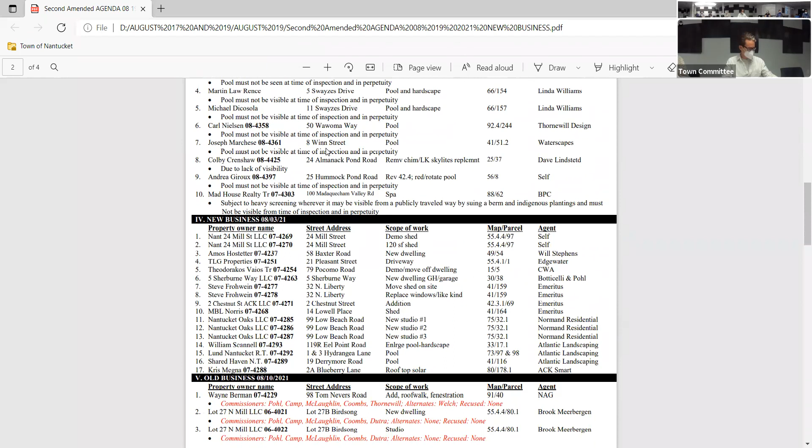Thank you. And the agenda is all set to go. Is that right? It is indeed. Okay, can I have a motion to approve? Motion to approve the agenda. Diane, you were all over that one. So on Diane's motion, Abby aye, and John is in favor. Diane, on your motion? Aye. Good, aye, and I'm in favor too, so that motion carries.

Any public comment? Hearing none, we will move along to, oh wow, we got a pretty healthy consent agenda. Oh, I have a question on one of those.

Yeah, okay, go. So it's on the one with conditions. Oh, consent with conditions? Yes. I don't see that anyone on our board right now has a conflict sitting on this, so I would request a motion to approve the consent.

Okay, that I will do. Very good. So Abby's made a motion to approve the consent agenda. On that motion, Diane, aye. Thank you. John, aye. Very good. Abby on your motion, aye. And I'm in favor, motion carries.

And you had a question on consent with conditions. 78 Milk Street, I just wanted to maybe take a peek at it. It's the one that's very exposed, it's that triangle. Milk Street goes... oh yeah, there, Tom McCann's and place, yeah. It says pool location, but I don't know what they mean by that. It's right at the end of the triangle.

You know, it's interesting you brought that up. Well, have it ready to go. So I'll give it a look. I just saw 5 pools in a row and said maybe I better check and look at all these pools. All right.

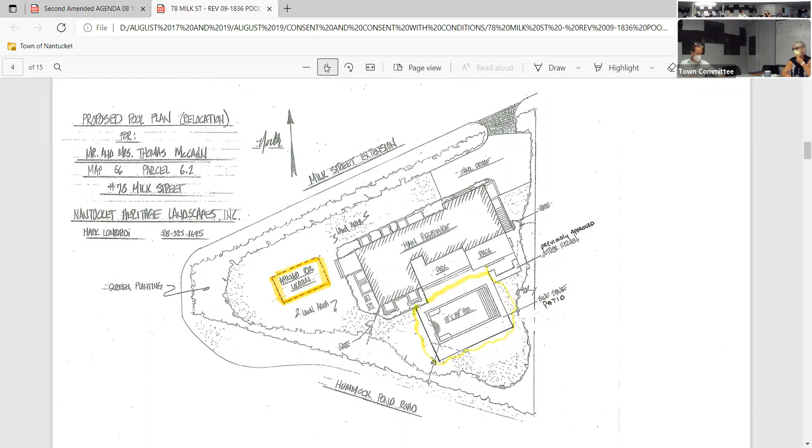So let me just say, Abby, if you have a concern about this, what we should probably do is pull it off of consent. Yeah, I'll make a motion to hold for review, or actually in point of fact, let's do this: your motion would be to remove and review that item. What's the number on that again? Item 3 from consent with conditions.

Would that be... yes, please. Okay, Abby's made a motion. So here's what the motion should be: approve the consent with conditions, accepting item number... with the exception of item number 3, which should be heard separately.

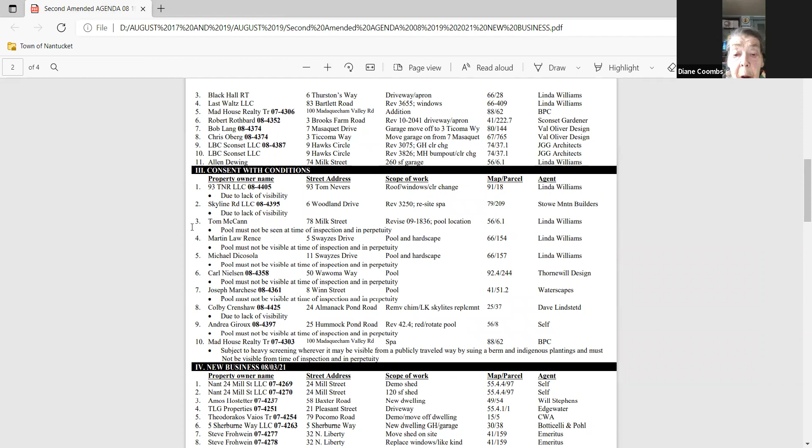So on Abby's motion, Diane, aye. Thank you, John. The motion is to approve consent with conditions, but pull out the pool application that was on consent with conditions because we might want to take a further look at that in terms of visibility. So consent with conditions approved with the exception of item number 3. You're okay with that motion? Okay, thanks. And Abby on your motion? Yes. And I'm in favor, so that motion carries.

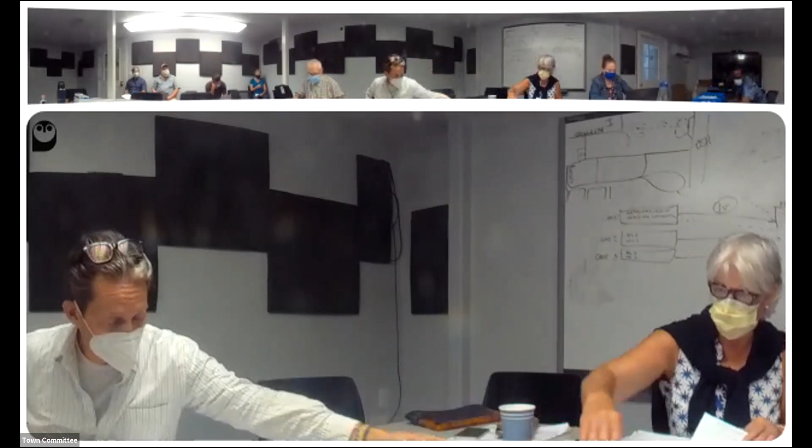Okay, so that was consent with conditions. And now we're going to new business. Do we have somebody here for 24 Mill Street? We do not. Okay, so we're going to need a motion to hold items 1 and 2.

We're gonna hold these two. Let's see, you're right here. This is approved, this is approved, yeah. So now we're on to these first two, but there's nobody here to represent these.

So we're gonna make a motion to hold those two for representation. Okay, moved. John? That's my motion. Okay, so Abby's made a motion to hold. On the motion, John? Yes. Diane? Aye. Abby, on your motion? Aye. And I'm in favor, motion carries.

Okay, Will, you're up next. Matt Schiffer is the project architect. Oh, okay. Hi. Should I stand up or? You can have a seat there.

Okay, now it's just a minute for us to get our drawings. I'd like to pass out an additional drawing if I could, just to supplement. The issue we have right now is we're running what's called a hybrid meeting, which means Diane Coombs is in that little owl right there.

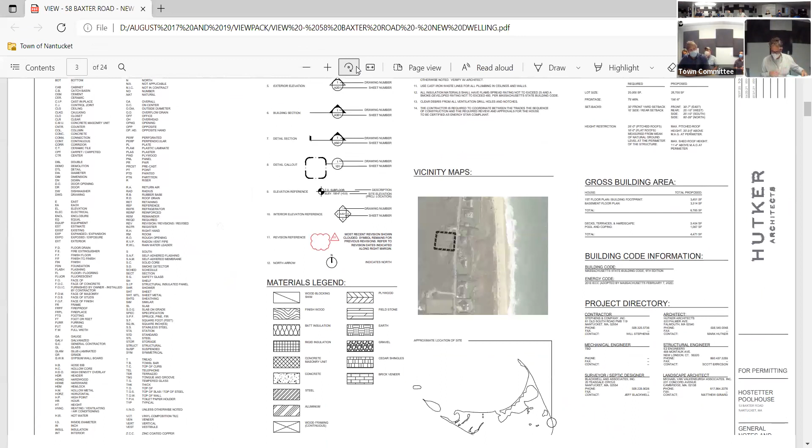All right, so this is on the other side of the street. Yes, it's on the other side of 58 Baxter Road, across the street from the owner's main house. This is a new residence that you arrive at by going through a break in the edge of the vegetation on the road. You go down a winding path through the carved out oak shrub that's present.

That's going to be kept there as well. And then you discover the front entry of the house at the end of this path, whereupon you see the front entry, which is a very vernacular looking front door. And you're confronted with low-lying gables, shingle gables meant to relate to the character and scale of Sconset.

The structure is a one-story structure. It's basically an L-shaped gable. And then on the interior of that L shape, facing south and towards the west, there's going to be a pool.

Is that a separate application? Yeah, it's a separate one.

And then as you look at the front entry, if you see the rendering, on the right, the gable on the right has the kitchen, living room and dining room. So it's pretty much an open structure on the interior. And then the gabled structure with shed at the end on the left is a gym and pool room centered on the pool itself. So that's really sort of almost like a cabana gym.

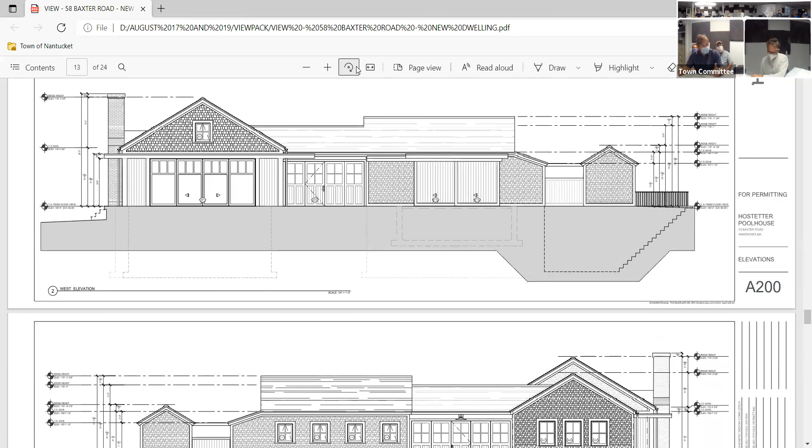There is a basement, and in the basement we have two bedrooms. The rest of the space is still to be determined, but we're thinking it's just a child's playroom right now. So there might be art and projects in one area, and we're not sure about the rest, but the rest is gonna be a mechanical room.

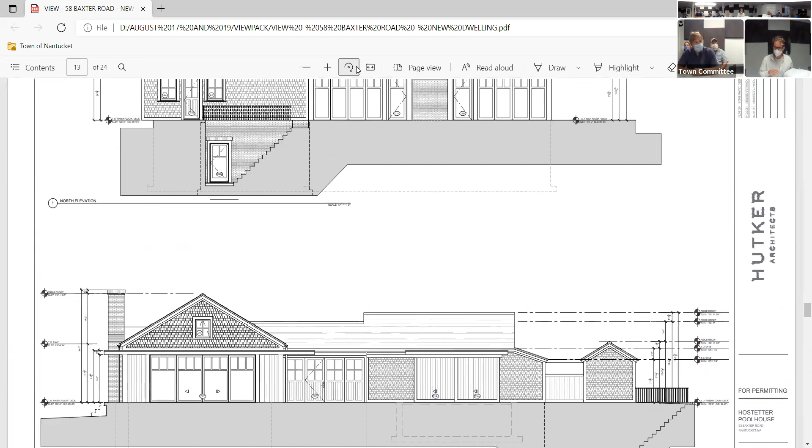Is that it? Yep. What are your colors? We're thinking natural cedar, Nantucket gray trim, and all the trim is very flat profiles, very much in keeping with the local character. The corner boards are 1x6s, Western red cedar.

The shingles themselves are yellow cedar shingles, which silvers out more consistently than say white cedar. So we like to use that because it doesn't have splotches of different weathering in different areas. What kind is that roof? A yellow cedar.

The windows are gonna be made by a vendor in Vermont, Ralph Hirschman, so it's gonna be a custom window system put together by him. He makes them out of wood, and they're gonna be primed and painted in Nantucket gray.

Thank you. Holly, yes sir. I have historic district advisory comments from August 9th. Basically, they had no concerns due to the low profile and lack of visibility. From a staff's perspective, I just want to note that the proposed dwelling's architecture should blend in a little bit more with the 1920s and 1890s structures across the street, keeping with that part of the concept. Those are my comments, Mr. Chair. Okay, thank you.

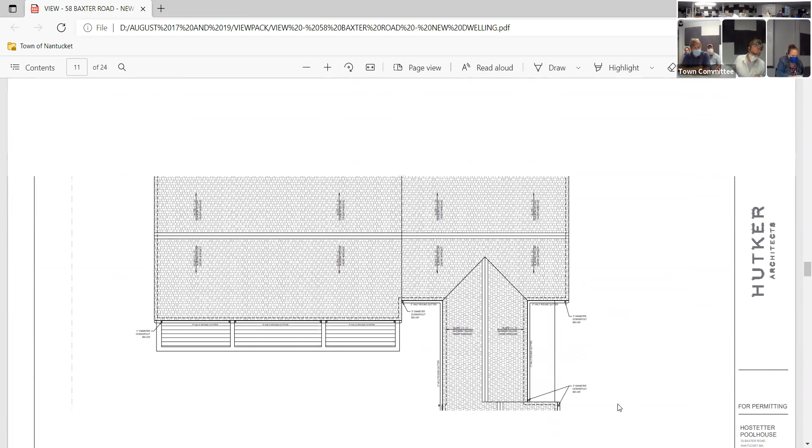Well, but what's the topographical? I think it's super flat, but if you want that... it's super flat, I know this. Oh, actually there is topo on it, and the certificate of appropriateness lists the grade change per side. The greatest grade change is on the western side, which is about 2.5 feet, and the other ones are fairly marginal.

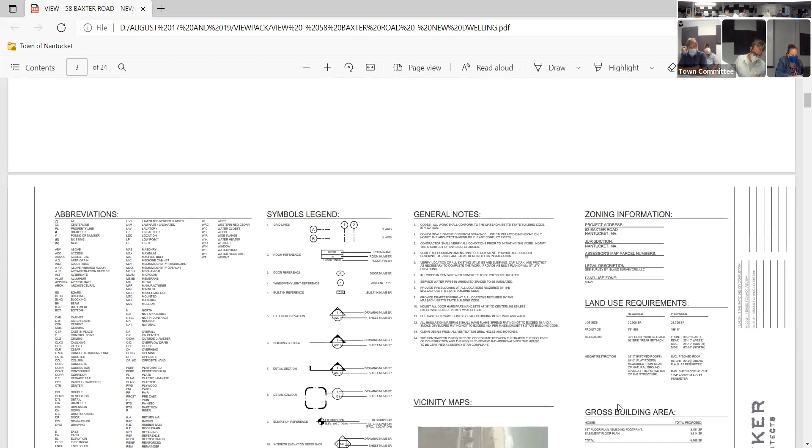But we are going to follow up with the landscape drawings and design for all the hardscape.

Everybody, these roof pitches are all 7 and 12. They're not identified on the elevations, but it says it on the roof plan. Are you referring that the roof pitches should be something else? No, I'm just saying it's not marked on there.

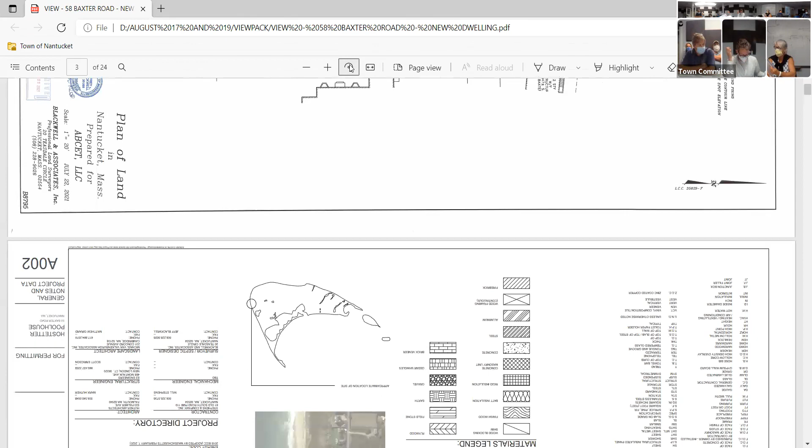And the chimney's brick, and the forms were really meant to be sort of like almost utilitarian forms, like you'd see in fish park or something.

So east is the side that faces Baxter Road. Oh, these are all casements. The ones on the front on the rendering are awnings, the little squares that are 2/2. And then the others, there's 2/2 double hungs, which are going to be wood, probably mahogany, primed and painted in Nantucket wood, with true divided lites.

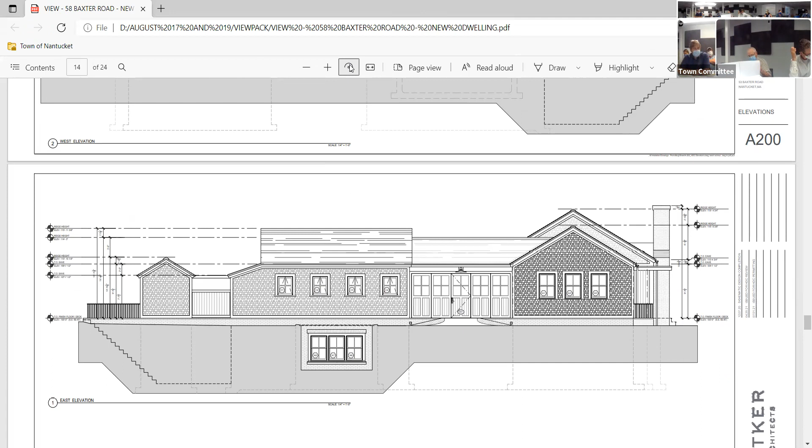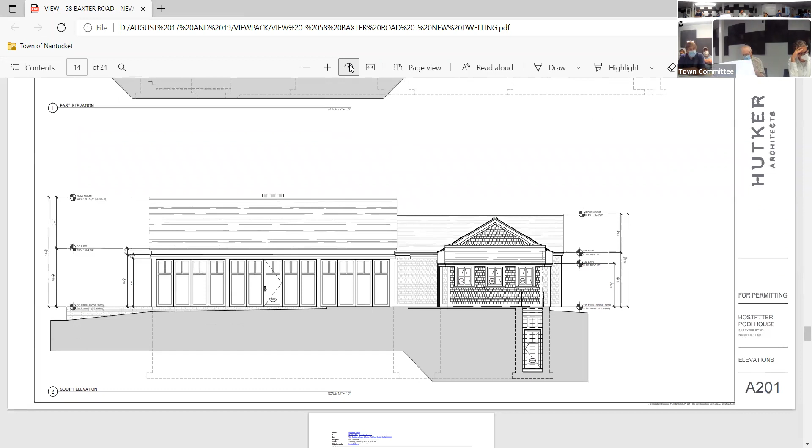Who owns this massive parcel of land to the west of this, between your property and Sankaty? That's Scott Trust, right, Sconset Trust? Yeah, they donated it when they bought the property.

And this is the beginning of Sankaty Golf Course? No, that just goes across Sankaty Road. It doesn't connect to any other.

Okay, anybody want to start? Go ahead, John. What's the length of the building? Well, the length is... length's 104 feet.

104 feet, one at a time. Okay, well, 104 feet long. 104, thank you.

These are rolling doors, right, am I correct? Slide, yeah, they're yep, correct. They're sort of an accordion style door.

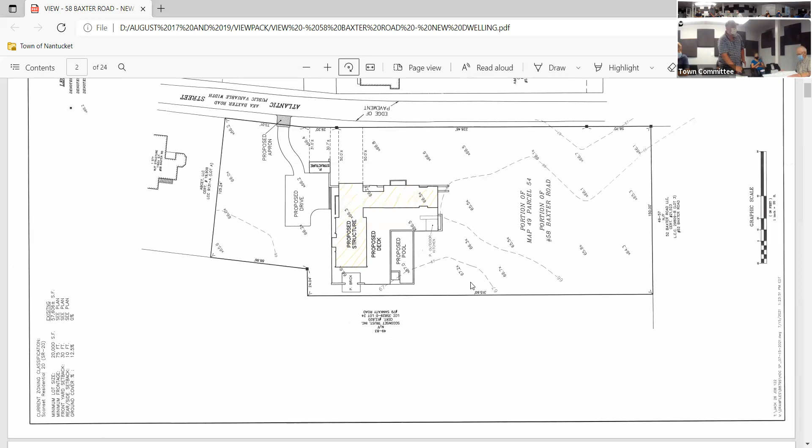Is this lot part of all of this? So this is a separate lot. This was one lot, it's been subdivided to here, so this is a separate lot, and this is a separate lot now. And the paper road you were asking about is kind of like through here. There's no road cut through the two. Yeah, it's a paper road that doesn't... okay, I'll look for it.

Go ahead, ma'am. No, we're okay, gonna drive through the middle.

Abby, are you ready? Yeah, so initially I was like, this is a very refreshing approach to that side of the street. I think they already have a house that's to the right, and it's also a low-lying house, very similar to this in architecture and so forth, except I don't know, is it also gray trim or is it natural to weather?

No, those are both, the two Benchley houses are both like gray, it's Nantucket gray I think. So maybe I'm... But Abby, you're thinking across the street, right from the Benchley house? No, so I'm thinking to the right of this property, if you're looking right at this property, there's another Hostetter house that they built.

Is it natural weather trim on that one? No, it's painted gray. It was Cortland blue and we changed it through HDC about 12 years ago or something.

I understand what HSAB says about it having a slightly modern appearance compared to the house across the street, but if the vegetation gives you peekaboos of the architecture through it, I think it would be fine. I'm sure anything these people do is going to be great, and it's reassuring to have that feeling. I think the architecture is appropriate—it's simple, it's low, it's gray. These are things we asked for. And although the windows are slightly square and the entrance slightly atypical, I think it's refreshing. I really don't have a negative to say about it.

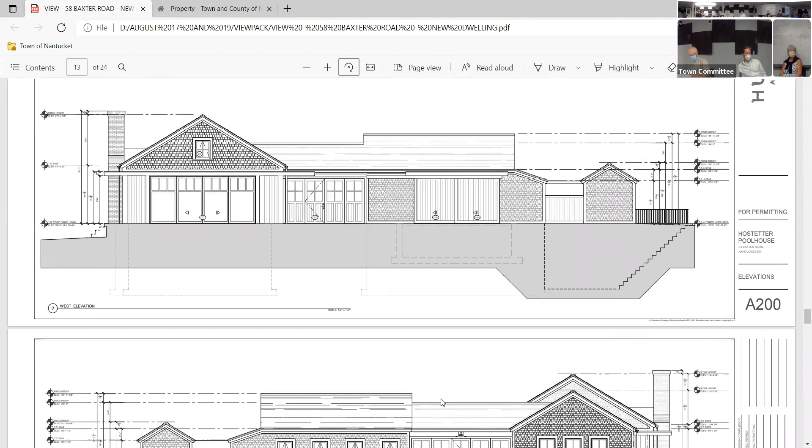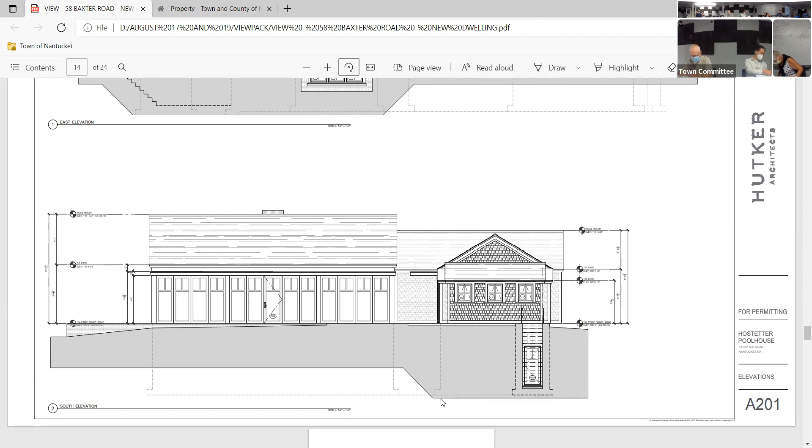I'm a little concerned about the south elevation because I believe you'll see that from Baxter too, with those long expanses of windows facing out to the pool. Ditto on the north elevation—you've got a lot of expanses of glass there, and well, I'm not loving the chimney either. On the north elevation, all that glass you'll see from Baxter Road traveling down, and the south traveling up. Those are my only concerns.

So what would you guys like to do with it? I think you have to figure out whether that is actually visible when you're driving down Baxter Road, because I don't want to see all that glass either. But how would we figure that out?

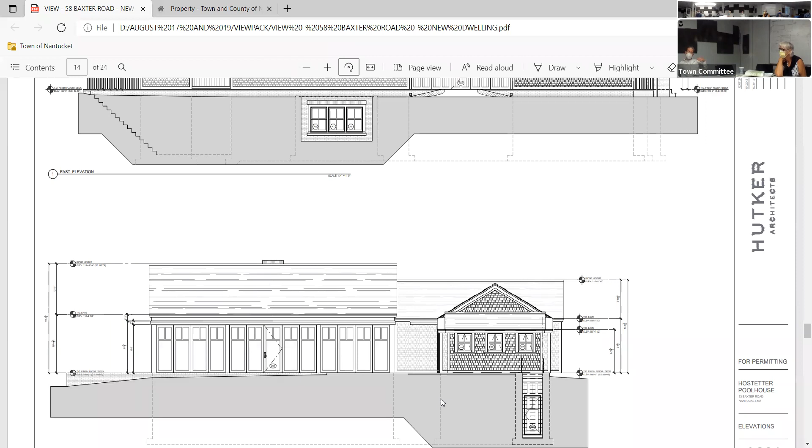Oh, I actually have an idea—I think it'd be a relatively easy thing to do. If you were able to stake, not necessarily the front elevation which faces east, because I don't think there are any issues there at all, but the ridge of the bar that goes back—stake the two sides of that, then we'd be able to see from north to south, going east to west, the ridge.

Correct, going east to west. And I suppose if it's possible, you could stake the southern side of the main mass too—this would be to your benefit, because a lot of that mass is actually gonna obscure some of the stuff you see coming up from the south. Kind of what was meant by the L. So honestly, I think that's probably gonna be okay. The north would be of more concern, because that's just a flat-on facade without anything to block it. Right, and it's got a driveway.

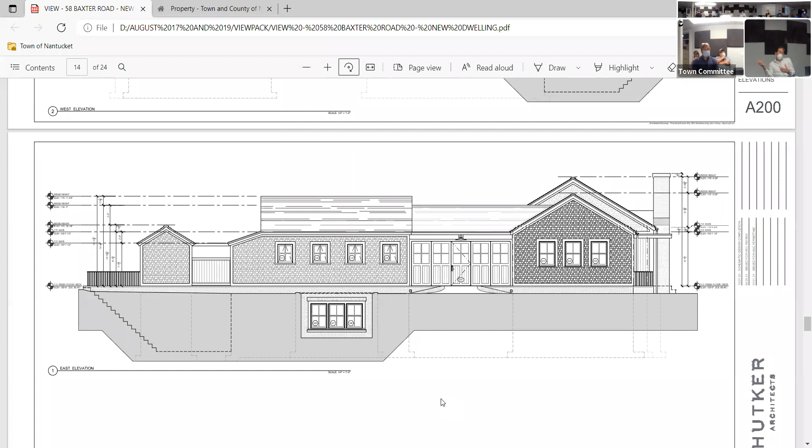That's a great idea, that concept—should we just give it a try? Yeah, I like that motion. So the motion would be to put up some stakes on those ends so we can see if we can see it coming down north. Yes. All right, so we've already done it, so we can just submit it.

We did a really extensive study to make sure we couldn't see this, so I've already done the ridge. Are they still up there? No, the client asked us to take them down because people were asking about it, but we have photo essays of the whole study already—we were concerned about the client being able to see it coming up Baxter Road, and we're trying to keep this thing as hidden as possible.

I hate to ask, but can you put them back up? Yes. If you could put the whole thing back up. Okay, good, great.

Abby made a motion to do a viewing with 3 height poles. On that motion: Diane, aye. John, aye. Abby, on your motion, aye. I'm in favor too. Thank you guys very much.

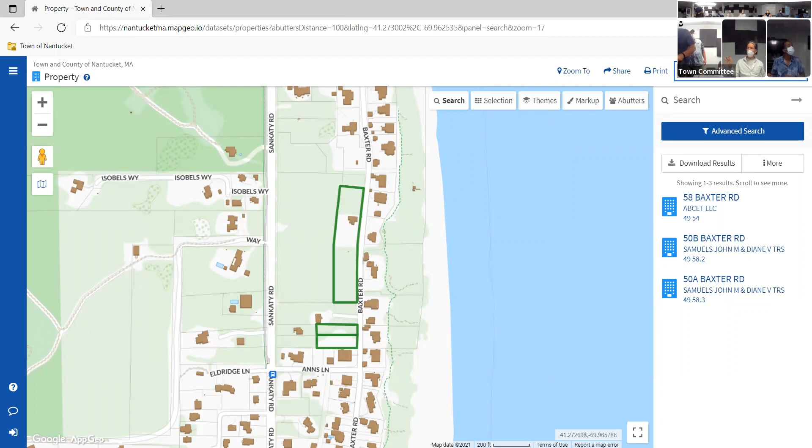Is this to come back on Tuesday? Sure. I'll send this to Jeff, I'll put together a rendering, a photo essay. The poles go up before the weekend. Call the office and let them know they're up, and they put it on a viewing list so we can go out independently on the weekend and check them out before Tuesday's meeting. Just shoot me an email.

Next up, 21 Pleasant Street. Anybody for that? Doesn't look like it. Call for rep. So we're holding item number 4 for representation. That was Abby's motion. On Abby's motion: Diane, aye. John, yes. Abby on your motion, aye.

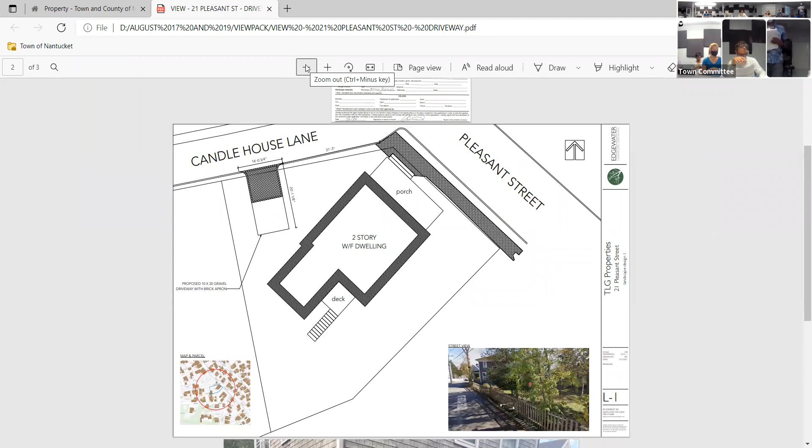Originally they were gonna renovate it, but there's so much water damage. They had a pipe burst over the winter. It's gonna be cheaper to demo than to salvage. Yeah, the water is pretty bad and it got all moldy. They didn't catch it right away.

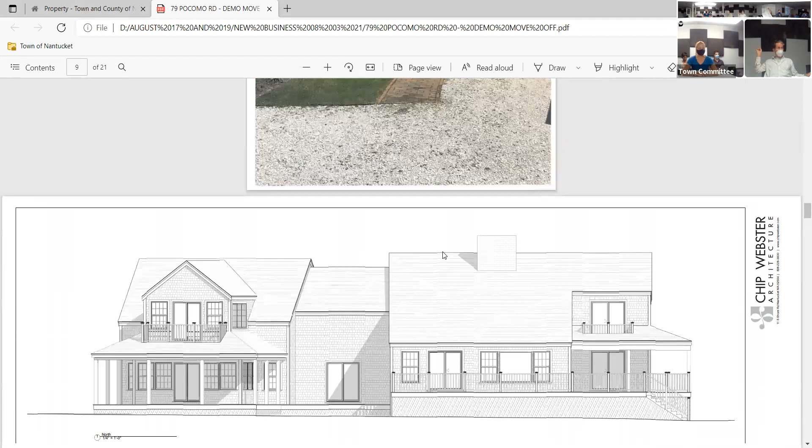Do you know approximately when it was built? No, I don't have the internet here. I think it was in the 70s, but I can get that, since I wrote it down. It sort of looks like a 70s type building to me. Yeah, it's definitely not historic.

Right, which is our main issue and concern. Originally they were gonna finish the basement and do a bunch of interior work, but they're just gonna start over.

Does anybody have any issues with the demo or move-off of this building? I would add, if I was going to approve it, that they try to look at the windows and see if they can't be salvaged by somebody - somebody might want some of this stuff. I'd add that to a motion, maybe try to part it out. A lot of the damage is around the kitchen and down to the basement, but there's a whole wing that's still okay.

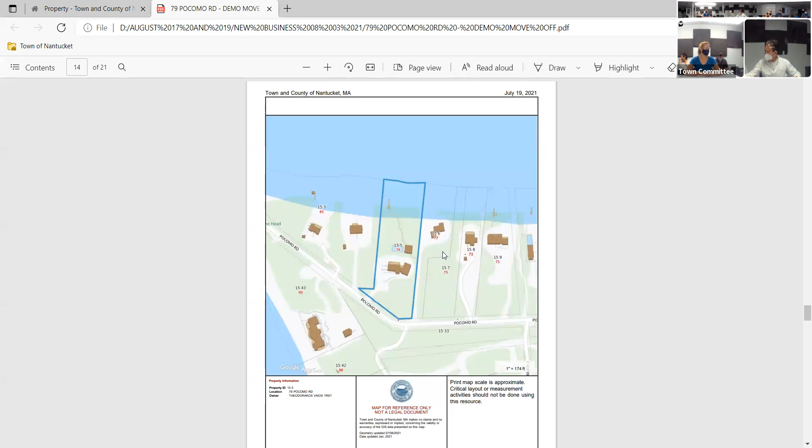It's built in 1976. We'd all love to see people salvaging stuff that's able to be salvaged off the building, particularly if it's going to be demolished. The request on this one is actually to demolish or move this building off - it's got a lot of water damage. It was built in 1976.

Do you have any concerns with it being moved off or demolished? Are they gonna replace it with something? Well, I would imagine so, but we don't have that design yet. What's the age of the building? The existing one should be on the first floor plan - the building is 102 feet long. That's a very large building, that's all I'm saying.

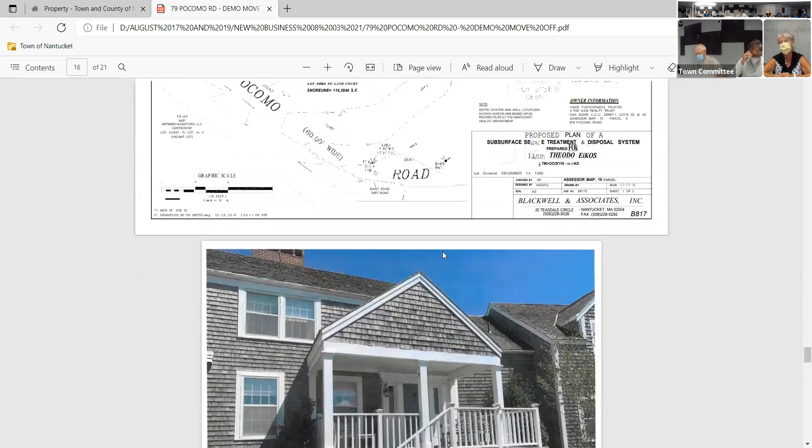I'll make a motion to demo or move off, and please salvage anything you can - the lumber, fenestration. That's Abby's motion. On Abby's motion: Diane, aye.

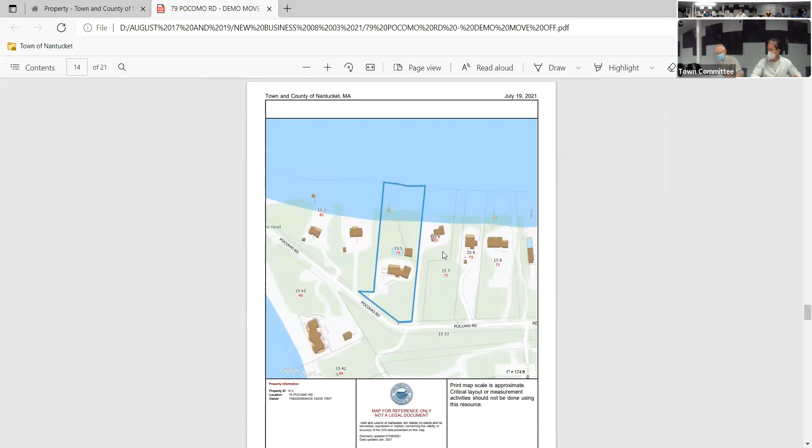John - I'm still looking for... Oh, you are, okay, alright. Don't worry John, it's got all this awful stuff, it's all going to heaven. Hey Ray - yes, Diane? I'm seeing Stephen on. What did you say? Stephen is on. Oh, Stephen's on, okay, good to know. He'll be up next with my application, because I'm gonna have to recuse anyway. Good, thanks for that, Terry.

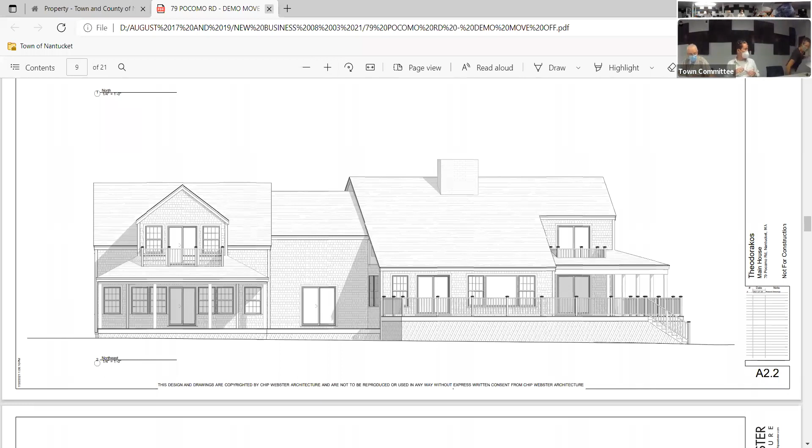John, are you okay with the demo move-off of this building? Yeah, alright, so that's my vote. And Abby, you're good? Yeah. I'm in favor too. So that motion carries. Now we're at 5 Sherburne, and I'm gonna recuse. Stephen, are you there? I am. Okay, so Abby's chairing. Actually, we have Stephen and Carrie Thorne will just join our ranks. Hi, sorry.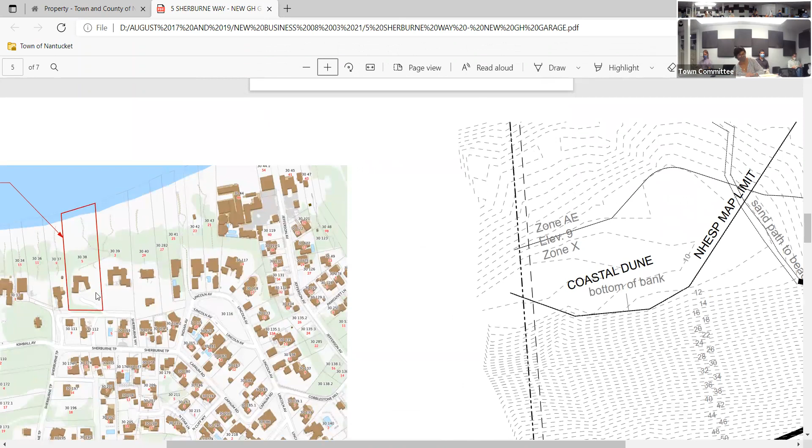This is a guest house for the house located at 5 Sherburne Way, which has already been approved. It's built on 2 levels, with a lower garage half a flight down to take advantage of the slope of the site. There's a guest house attached to it that opens up to the pool, which will be on the northwest side of the house, to the west side.

The garage slab is at 56.5, and the first floor of the house is at 63.5. So the pool, the north elevation is facing the pool. Yes, facing the water.

Fine, garage. Yes. Quite a great job.

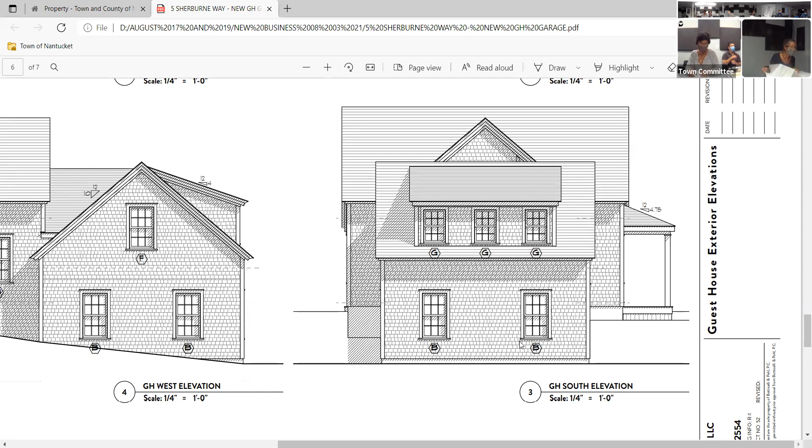I really like it, and I think the most minimal elevation in terms of effect is facing the roadside, which is south. Yeah, that's correct. Not that you can really even see this from any sort of public way, down the driveway. I think the cottage is really cute, and the garage is so cool. I like it a lot. I think it's totally appropriate for that.

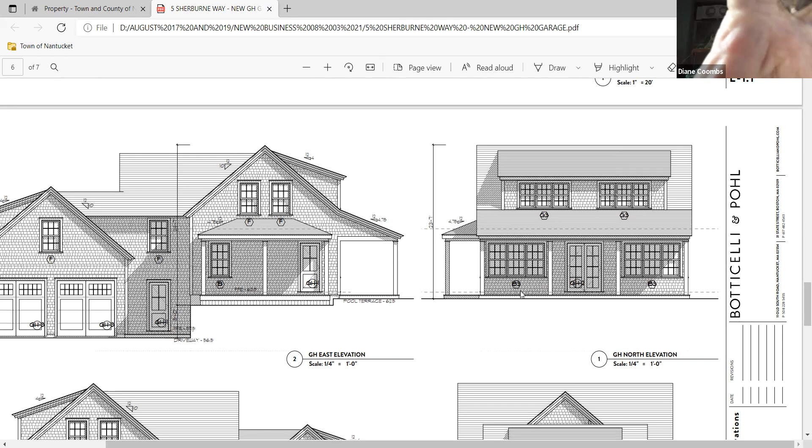I think it's good, the simplicity on the north elevation. You won't see that because it's facing down to the water, right Lisa? That's correct, it's so far back, there's no way you'd see that at all. I appreciate the height, because I found the marking of the height as being 23 feet, and I appreciate that, which is good, so I don't have any major problem with it. I think it's very nice, should fit in there, and it's appropriate certainly.

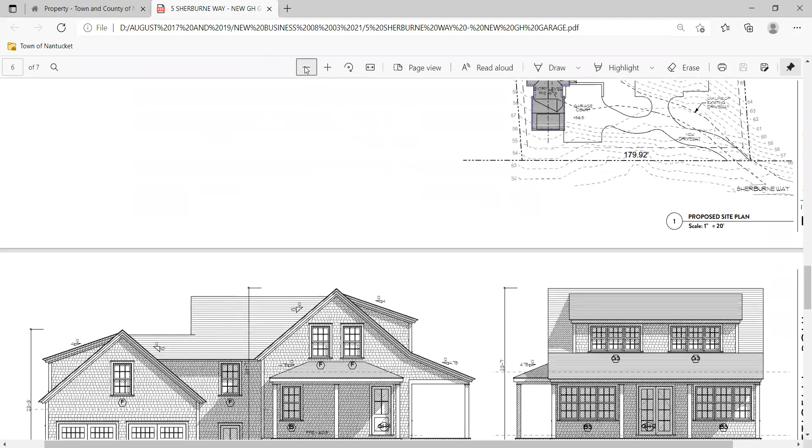Sure, can we just flip up to the site plan please? Nope, is good, nicely designed.

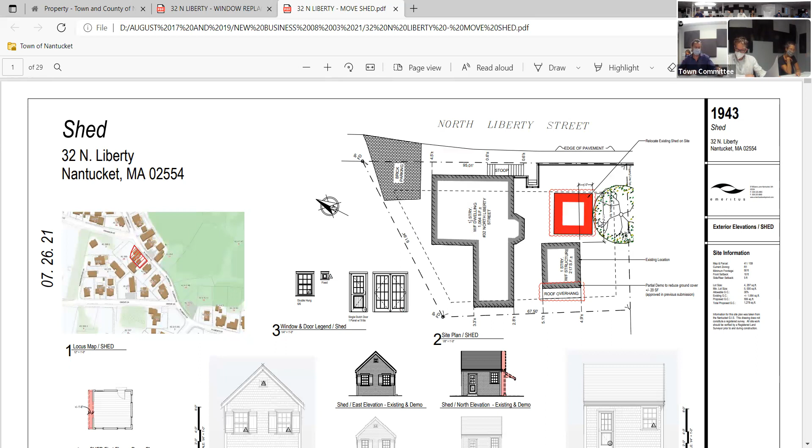Oh, good, pretty charming. Can I go? Yeah, go ahead.

I just want to mention, the HSAB did say that moving a shed or any secondary structure close to the street is counter to Building with Nantucket in Mind, and would prefer to see it back off the street in the original location or pushed further into the corner. I concur with that, but I also appreciate the reuse of this structure. I remember there was an application for a demo move and the commission was strongly against that.

Those are the comments, Mr. Chair. Okay, thank you, now you can go.

So I'm remembering something we passed on Pleasant Street where we did the gable the other way around, and I really regret having done that. It always sticks in my mind, like don't ever do that again. So I'm happy that this is the east elevation on North Liberty Street, and I think it's small enough. It shows up really large on your site plan, but I don't think it's that big in relationship to the other structures.

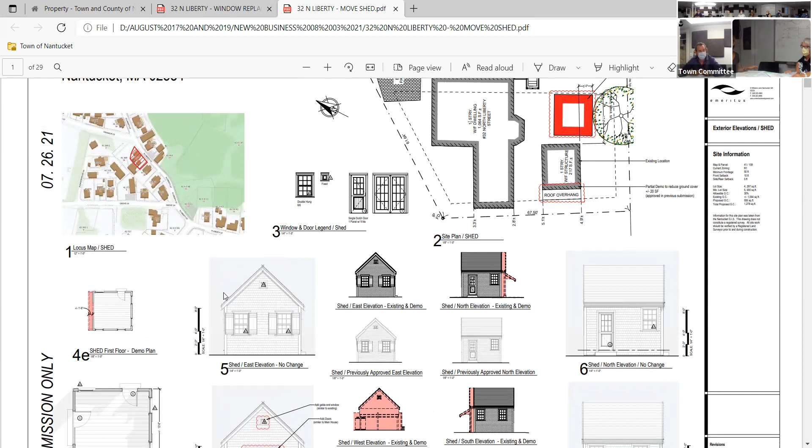I just wish I knew what the house looked like. There should be photographs. Here you go. It's a really cute little shed with a nice little shade, black shutters. The next application we're applying to change some windows on the front of the main house. Thanks, that's good.

I'm worried about the mud in between the two buildings, that's all. How is it gonna dry? Anyway, that's fine, I'm okay with it.

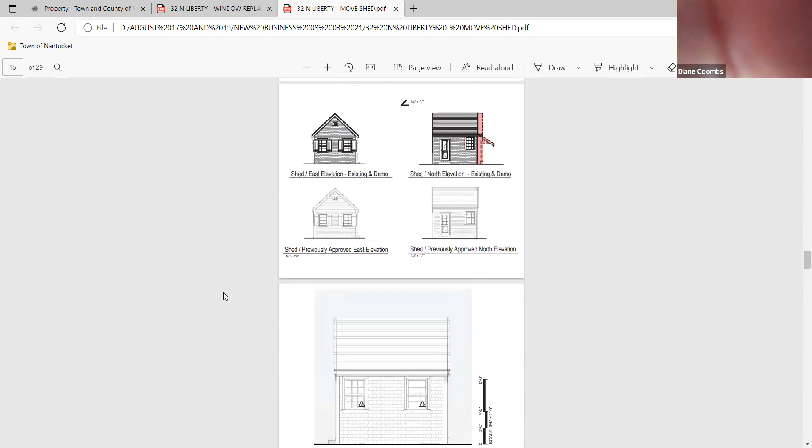Okay, Diane, how about you? I am fine with it. I'm glad that it is being saved. It's a nice shed. What you're removing, I don't think will be bad, and I am glad that it is going to continue there. Thank you, okay, thanks Diane.

How about you, Carrie? Yeah, I agree, I think it's a good building. All right, fantastic. Well, John? Yeah, question, there's a little overhang roof here, is it being demolished? Yes, that's coming off, all this pink is coming off.

Thank you, I think you can do a motion on this one, folks. Motion to approve. All right, Abby's made a motion to approve. Carrie? Aye. Diane? John on the motion? Aye. Thank you, Abby on your motion? Aye. Aye, there you go, thanks Diane, and I'm in favor, so that motion carries.

And now we're gonna do paint color on the house, is that right? Oh no, replacement here, sorry. Oh, thank you.

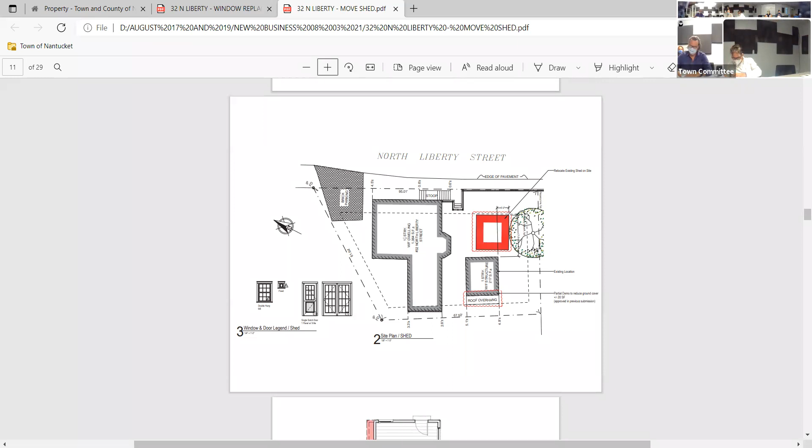Yeah, just jump right in. So, with your permission, Mr. Chair.

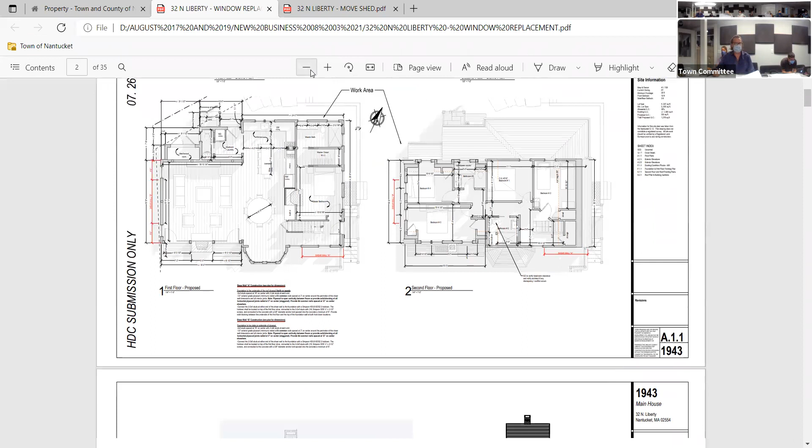This is the house that the board has previously approved. We are proposing new windows wherever there are currently windows. The existing windows are not original to the date of construction, so we were hoping to replace those as well. We provided detailed window photographs to demonstrate they are not original. This is just more of a clarification of the original application.

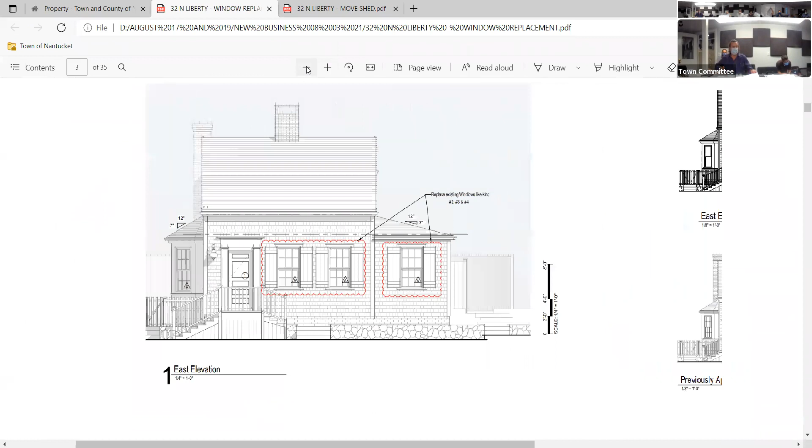So the only thing you're requesting here is to replace these bubbled windows? Correct, like for like. So no addition, or the thing on the front page that says addition? That was already approved. It's simply just to replace the existing windows, like for like.

When we got the original approval, we platted new windows, but when we looked at the original windows, they're not original. Are they TDL? Yeah, they're TDL. And the proposal is for TDL as well, the new windows.

Let's see. HSAP had no concerns. No concerns, okay. Like the sound of that. Okay, anybody want to start into this? I've never heard that phrase.

I'm ready to approve it. No concerns, I got it right here. Did you say you're ready? I'm ready to approve it. Does anybody have any concerns with the replacement of the windows on this house? HSAP has already said they're okay with it. You got any issues, John?

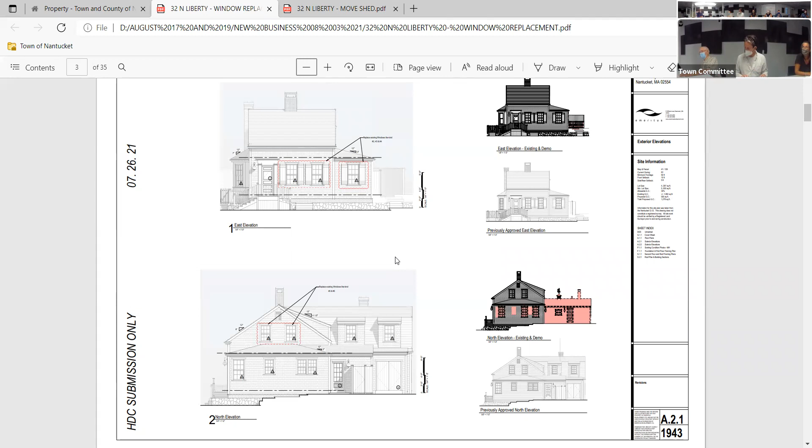Yeah, there's over 20 windows in this house. My question is, are we replacing it like for like, with what is existing there, same company or what? It's a single pane window with a wood muntin, though I don't know the original manufacturer. Our proposal would be to replace it with a single pane window with a wood muntin. I do not know the manufacturer at this point.

Okay, you're only going to replace the ones in red? Only the ones that are clouded, that are bubbled, yeah. This here, is all this being demolished? No, that was left over from a previous application submission. They're not demolishing all that, it's just about the windows, 6 windows.

I'm good with it, yep. A motion to approve. Okay, thank you. Abby's made a motion to approve this. On that motion: Diane, aye. Thank you, Carrie, aye. Very good, John, aye. Abby, on your motion, aye. And Kate, all right, that's that.

And now, Stephen, you still with us? Yes, sir. All right, so you can sit on this one.

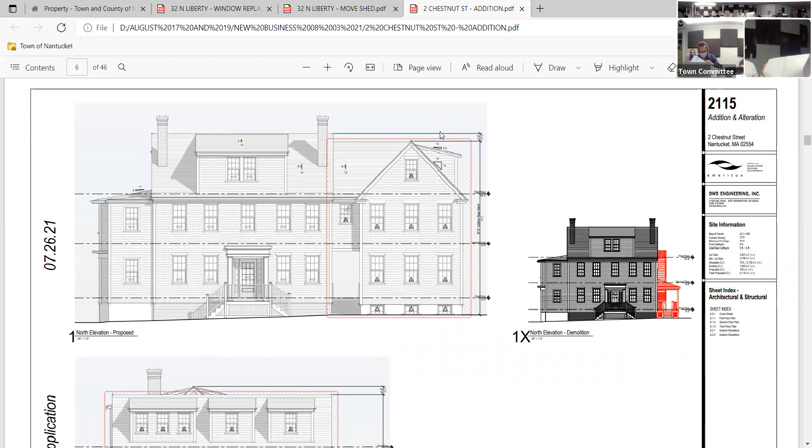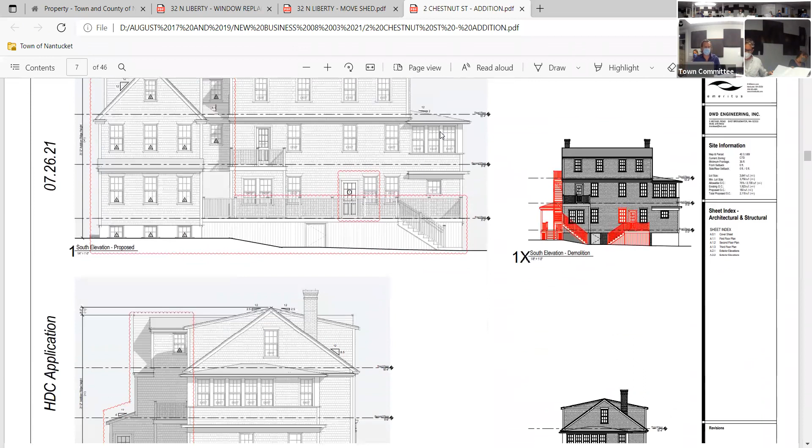One of the benefits of connecting the structures is twofold. One, we have to provide handicap accessibility to the building and the addition, and one way of doing that is to have this ramp that separates the 2 buildings on the 1st floor but connects them on the upper floors. I'll get back to one point about that detail, because I think a subtle little archway would make that transition a little bit softer. But basically, that gap on the 1st floor is our 1 in 12 access.

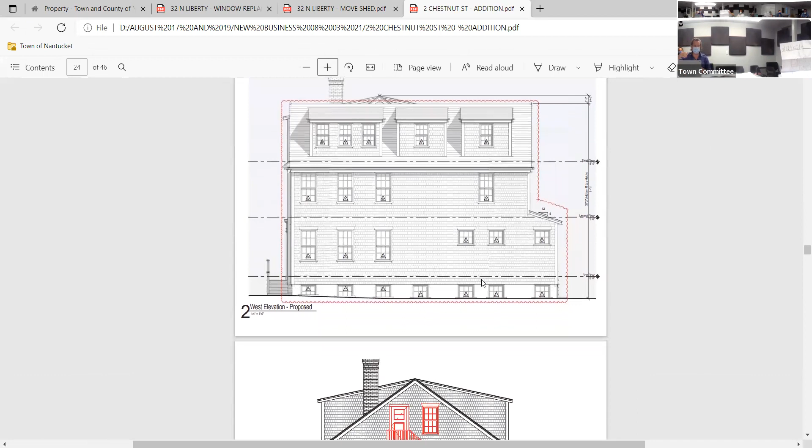We looked at a number of different versions of this, and I know I'm talking a little bit about code issues, but I think they're relevant because they determine some of the architectural components. Our alternatives were to do an exterior lift, which is not that attractive, or an interior lift, which puts a door at street level that doesn't align with the other windows. We felt this was the best solution, because it's analog, and because it's the most inviting to people with disabilities, really kind of a connected pathway to the inn itself.

The other part of this is that we are adding a protected means of egress for fire, for basically life safety, a rated fire enclosure in the new addition in lieu of that exterior fire escape, if you will.

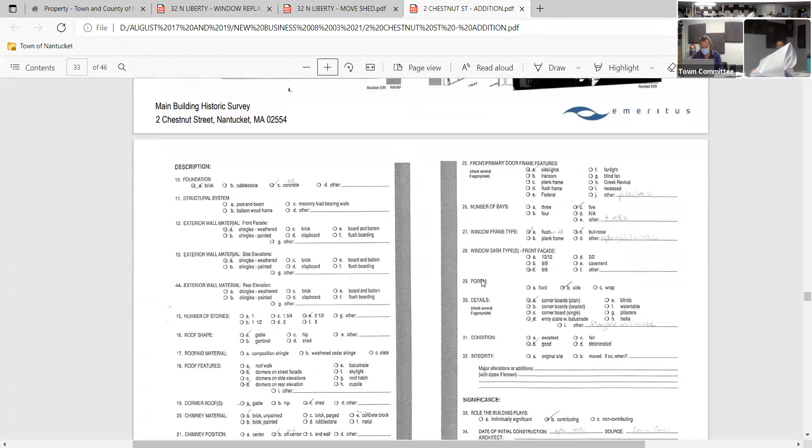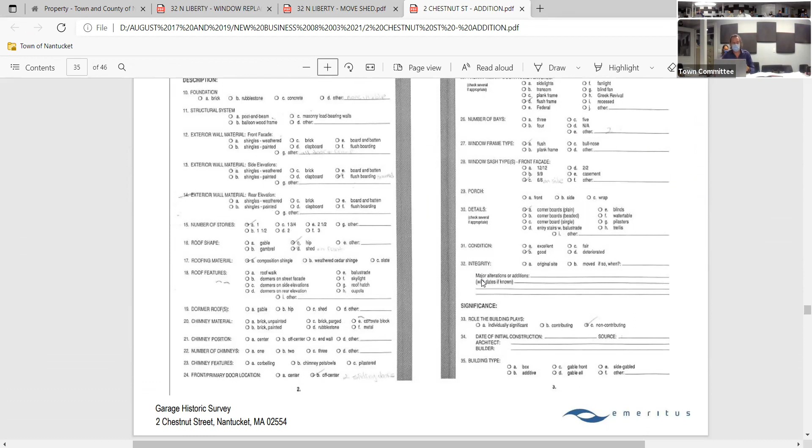So I just want to give you a little bit of background in terms of what we're doing here. If you recall the original approval, it's not too dissimilar in terms of just a gable forward structure. So, to that point, I was going to actually ask that question.

In what way or ways does this new addition differ from what we already approved? I'd say most notably the connectors on the second and third floor, and the plate height. I think the eave line was a little bit lower in the previous iteration because it was a completely detached building. But we are connecting the third floor on that wing, so that you have the protected means of egress in the new addition.

Other than that, I'm sure there are a number of details. I think that building actually had commercial fenestration on the first floor because it was an independent structure, so it was highly fenestrated on the first floor. So it's different in that regard.

That existing shed dormer is that existing shed dormer. That's not the most attractive. We're hesitant to start to edit that or mess with it, but we are open to it—we did make some considerations for potentially adjusting fenestration, either adding more or spreading it apart or something like that, but we left it the way it is for now.

Thank you, Matthew. I'll turn it over to the board. Holly—Mr. Chair, thank you.

For the record, the existing main structure was built after the Great Fire, circa 1846. Also, Lancaster does note in his book that the shed dormer was a later contemporary addition. We all know that. As for the age of the garage, I understand it already received previous approval for demolition. I wasn't aware of that, but per the assessor's information it was from the 1940s, as well as any other information I could find. I did notate that the file indicates the previous approval.

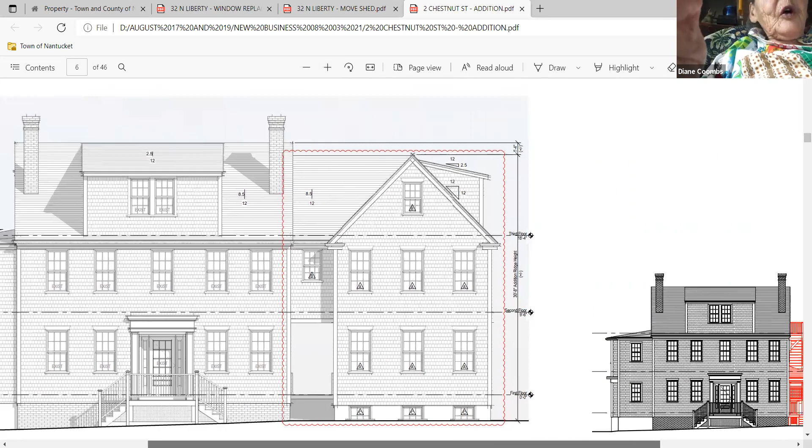Unfortunately for Matt, I agree a lot with HSAB. I think the second building is too high—looks like it's maybe a foot lower than the main building. I think the dormers are too big; whether that's an existing dormer over the front, the windows should be separated or the dormer brought in. It is overwhelming. If you know that Chestnut Street, the family that owned the building directly across the street, which was a bed and breakfast, had a small little Nantucket building. This is not that—this is a whopping big building, and to me it is too big. The dormers should be brought in.

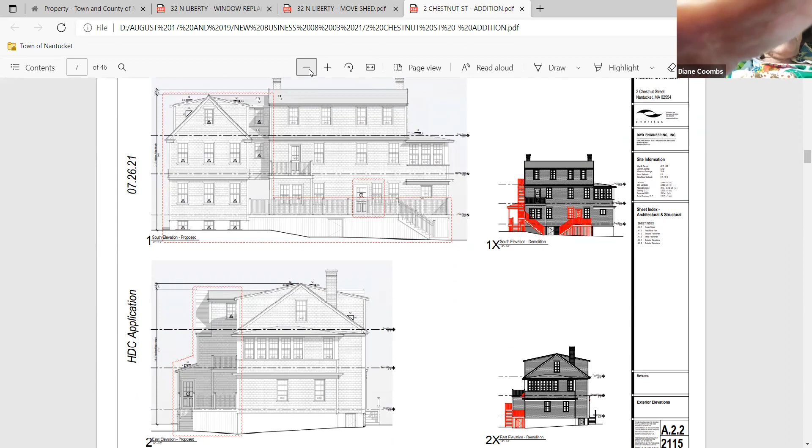Every one of them is huge and could be brought in, has to be lowered, I believe. And the windows are made in such a way that they aren't, it doesn't look like a hotel, because that's what it looks like now. And I think it has to be there. Let's see, not the north one, but the one right below it on my pad. It's hard to see. Those dormers look, you've got a little window in the middle of a huge dormer.

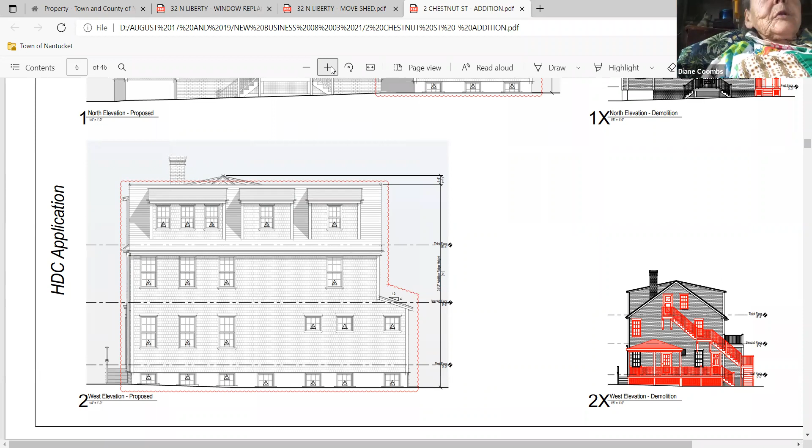The third floor is overpowering, I think. I think it needs to be reduced, and the third floor needs to be brought down to at least a foot or two feet lower than the main building. This is an old building. The garage next to it is from 1940, that makes it a pretty old building, but this was built after the fire. It doesn't look like it has any charm that you have on Chestnut Street.

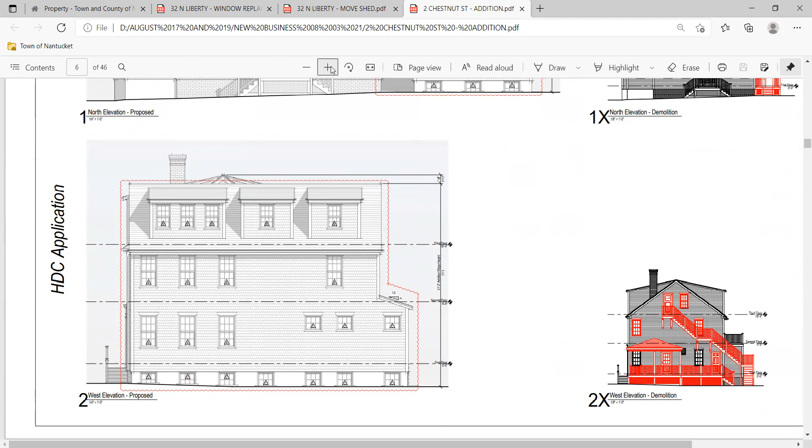Having said that, I do think the overall structure is a little bit too much. I'm not adverse to the concept of the connector, but I do think the connector roof is too tall. There should be more of a sense of a subordinate mass with respect to the connector roof and with respect to the addition itself. I want to be clear that I think the mass that's proposed, inclusive of the connector, should be proportionately smaller to some degree. But I also think the roof of the connector needs to be smaller still, because having the ridge terminate into the ridge of the 3-story or 2.5-story mass seems a little overwhelming.

I think generally, if this were somehow proportionally shrunken down or changed some way, maybe with roof lines, I would be able to support it. There are tall buildings that are basically two stories with dormers along this street. I do wonder. You okay, Diane? Sorry, I was choking. Thank you. No, that's why I wondered if you were okay.

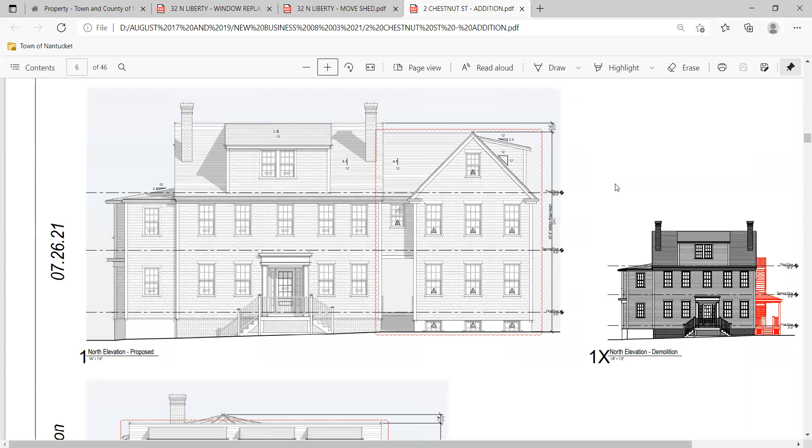The other thing is, I wonder if there are some design solutions. I understand there'd be a large compromise on the third floor, but to incorporate some type of a hip roof with the dormer on the main mass, it may get very confused very quickly. You may have already done some studies on this, but I don't have the benefit of looking at those. So those are my comments, Mr. Chair. Thank you, thanks Stephen.

How about you, John? Yes, I have a comment. Everything that's in red is being demolished. That's correct, John. Okay, and we'd rather go to the south elevation on A22. All right, now this is complicated. I think the existing is here. Yeah, right, and shed dormer. Right, 2.5-inch pitch.

General policy is, it always has been, shed roofs, anything on shed roofs have a 4-inch minimum. That's existing, right? Okay, it's in here. Oh yeah, I know it's matching the existing. I hear you. Well, sometimes it's not good to match existing when you have a policy that we've always used. Gotcha. Now, there's enough roof there above the roof, you can get a 4-inch pitch in there. I think so. Gotcha.

And that's my, I want some answers from it. You want them right now? Yeah, these should be 4-inch. I hear what you're saying. We matched, we basically have some height requirements we're trying to hit because it's new, and given the limited footprint and the roof pitches, the 2.5 pitch is the best solution. Because it's found on the building as an existing architectural element, we thought we could use it as part of the vernacular. But what I'm hearing from you is if there's any way to make it a steeper pitch, preferably a 4, we should try to make that happen.

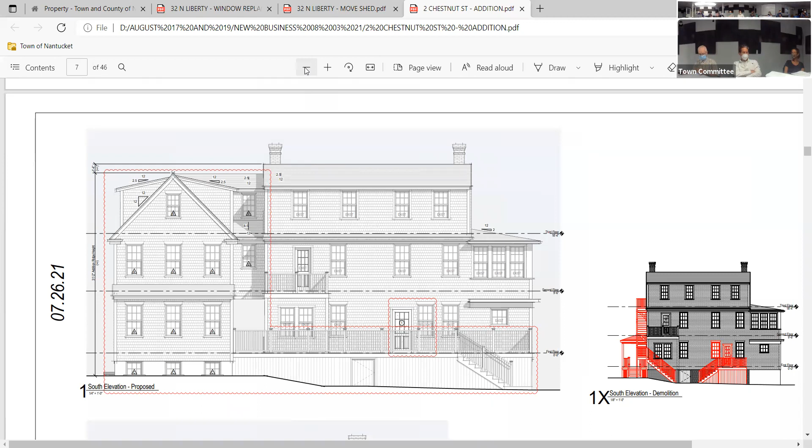That's my comment, I'd like some answers for that. Okay, well, he's probably gonna do some revisions, John. He's gonna be doing some revisions. So thank you, John. Abby?

I would like to see the 3rd floor dormer on the main mass reconfigured to fit the scale of the roof. You said that might be an option, because it connects to what I want to say about the proposed. The connector needs to be either disguised or designed up, like add a trellis or something. Right now it's reading as a hollow opening, so I'd like to see that dealt with, the way you did that great thing on Broad Street.

You did a good job connecting those two buildings. Third floor dormer — so on the newly proposed, the 3rd floor dormer on the west, I think has to be reduced and taken away from that forward gable. I think it's looking overwhelming. And then that dormer, if you could relate it back to that main mass dormer...

I don't know how you would do it, but on the far left of the main mass, there's a hip roof coming off on the left. I was wondering, it's a wonderful feature, if that could be incorporated somehow. I don't know how to do it, but I really like it. It's such a nice low pitch.

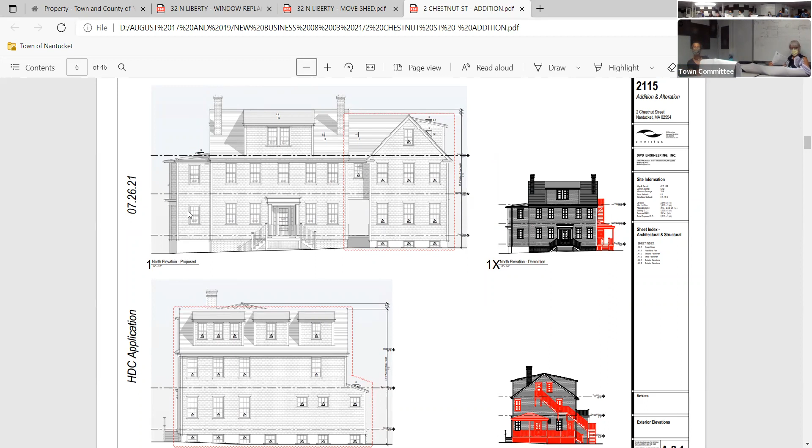On the east elevation? On the north elevation, you're looking at the main building, to the left, yeah, those steps going back. I'd like, if possible, to move that proposed back further from the main mass, make it a little more secondary, and also reduce the height by 2 feet. Thanks, Abby.

This 2nd floor connector reminds me of something, this little detail I really love, going on that alleyway behind Macy Warehouse. It takes you to Straight Wharf, that cobblestone alley, it's got that 2nd floor thing. I've always loved that, so I'm totally fine with that here. Little quirky things like that, I think, contribute to the charm of the downtown area.

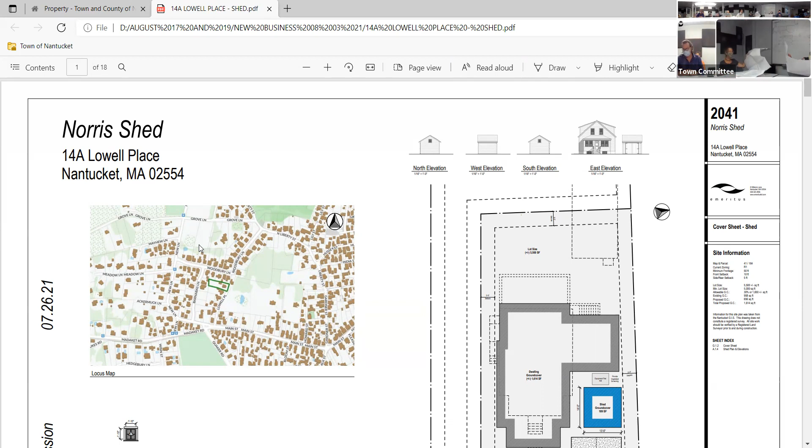Mr. Chair, I can jump right in here. This is an application for a simple shed. The lot is small and they want the shed close to the parking, so they can put bikes in there. The idea is to tuck it in beside the house. As you recall, we created an addition off the back of this existing historic structure, and to the right, or the north, the section is a one-story structure. This is a 200 square foot zoning shed for bikes.

That's all I have, Mr. Chair. Okay, thanks. HSAC, yes, Mr. Chair, HSAC took a look at this. Again, this is a reconstructed bungalow. Ideally sheds in the old historic district should be placed in the back of the dwelling. If it cannot go in the back, then it should be considerably smaller and set several feet back from the main facade of the dwelling.

I also noted, and that could be wrong, Matt, but it looks like your east elevation showing the proposed shed doesn't show that connector piece in the back of the actual structure, the main dwelling. It would be interesting to see from the perspective of the street what it blocks, the proposed shed. But I also agree that it should be located more to the rear, if at all possible. Those are my comments, Mr. Chair.

Okay, thank you. Who wants to start on this one? I was just looking at the dimensions. Across where the doors are, it's 13.6, and it's 14 feet deep. The HSAC was saying that it could be reduced. I think that's a good idea, because usually you see a driveway going back and the shed is in the back of the property. If this would be reduced, those were good comments, because what is that going to look like against the addition on the right? I think making it smaller would help the whole situation.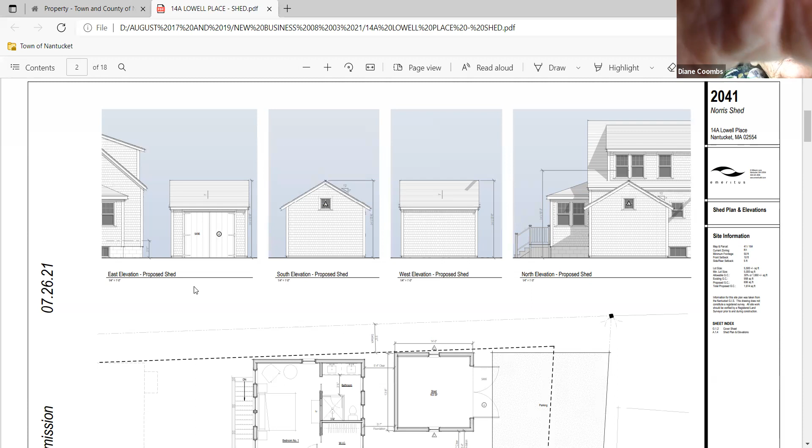Okay, thank you, Abby. Diane, you ready? Yeah, I agree with what Abby has said. It should be made smaller and set back further. On the north elevation, or maybe it's the west elevation, it has no windows at all. I don't know whether a window like on the south elevation, at least in the middle, would give it a little more presence on the street, rather than being so lacking of fenestration. I only see two small windows on the south and the doors, that's it. I think it would become less noticeable if it fit more in with the houses next to it.

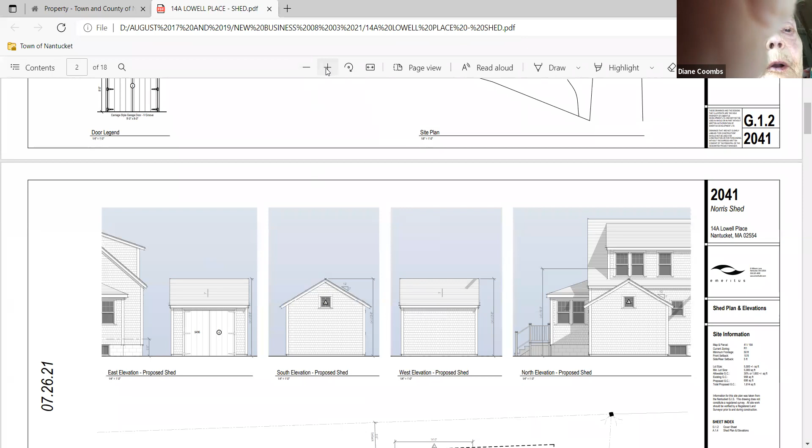It should move back, and I can't quite read how tall it is, it's 14 something. But if you look at the site plan with the other house, you'll see the comparison of the amount. It's 189 square feet. I don't know what the addition right behind it is, but I'd like to see it moved back a little bit. I don't know whether it could go all the way in the back of the buildings, unless they're trying to hide something, but I can't see what that would be. I think it would give the facade of the building more presence than having that garage with the doors right up in front. So I don't know whether it can be moved to the back to suit their needs, but I would think about it. Thank you.

Thank you, Diane. Carrie, you ready? Yeah, I think it sort of competes with the house, crammed in there, considering it is still staying sort of bungalowy. But for the shed itself, it's a fine shed. What elevation is that? North, I think the north elevation should have a larger window, because that's the only elevation you'll see from the street at an angle. Other than that, pretty straightforward little shed. I think relocating would be good, but not imperative.

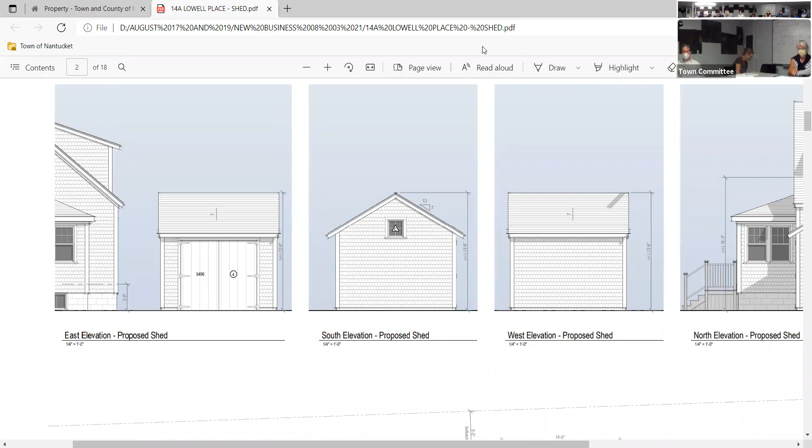Thank you. How late are you guys gonna go today? Well, 2:30 - looking at it, it's 2:20, so Ben is the last person for today. Thank you, Dan. Thank you, Ben. How'd you do today? How much do you pay him? I don't talk about that stuff.

Chairman Cohen, can I ask you a question? Previously these meetings have been on YouTube Live, but it wasn't today. Going forward, is the plan to always make them delayed? I got some maybe good news for you - this is the last meeting that's gonna be live for a while.

We're going back to Zoom, Tuesday night. It's not gonna be happening here - everybody's gonna be at their houses. So that means you'll be able to tune in from the comfort of your home instead of coming out anywhere. It'll be 100% Zoom, it won't be hybrid.

But this room doesn't get live, does it? There's an issue with it on Thursdays, and then we upload it after. I just thought I had listened live, but maybe I'm just - anyway, okay, that's right, Tuesday. Thank you very much.

She just wanted to know whether we're gonna be live on Zoom. So we're gonna be on Zoom next Tuesday. Thank you very much. I think we're always gonna be Friday.

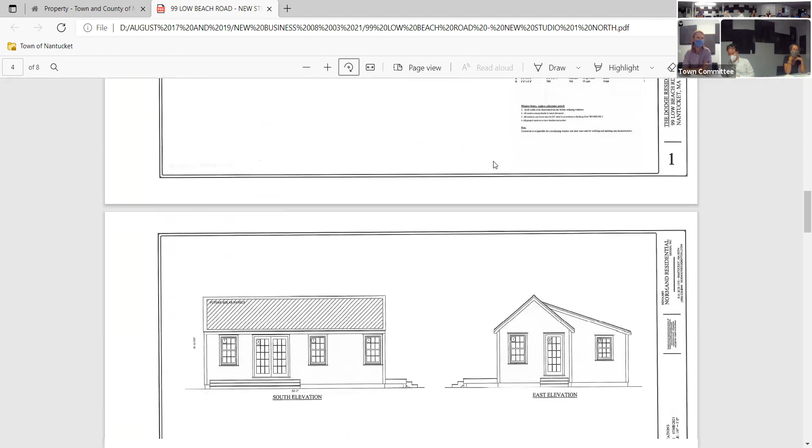I think maybe they max out at 16 feet, and it's just like a quintessential little Sconset community of little structures. So it's sitting on this same lot with this larger house? Yeah, we have that house approved - the plans are in the application for the main house, formal main house, but we wanted a little camp.

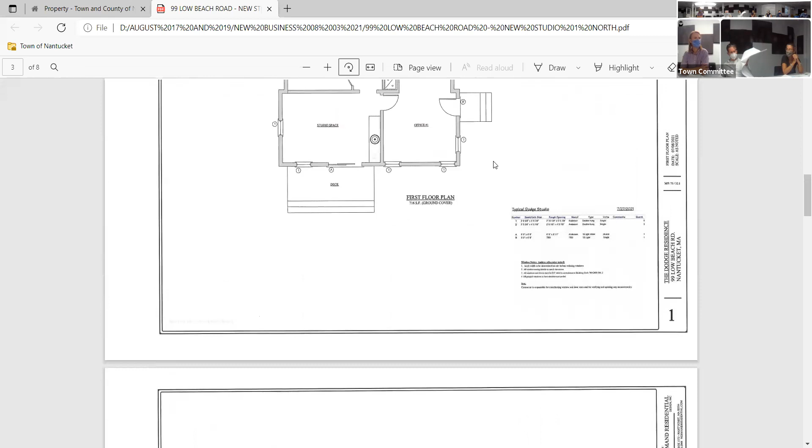I'm just going to speak on the 3 of them because I think it's applicable to all. It's a charming litter of studios and not visible - and I mean litter in the kind sense, like puppies and things like that. Cute things. Yes. Road traffic?

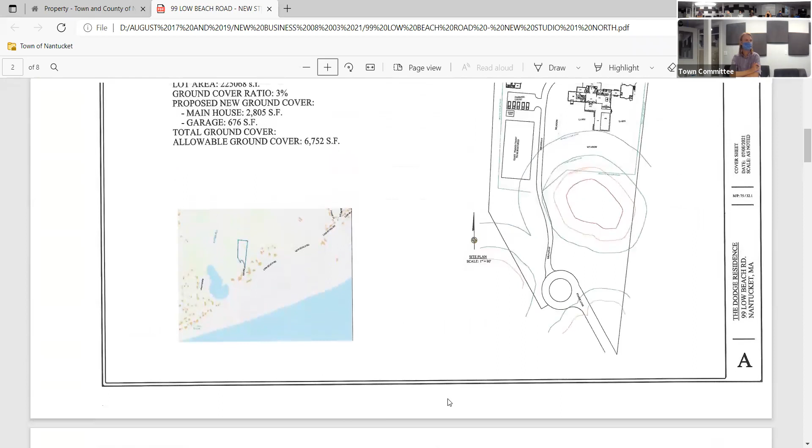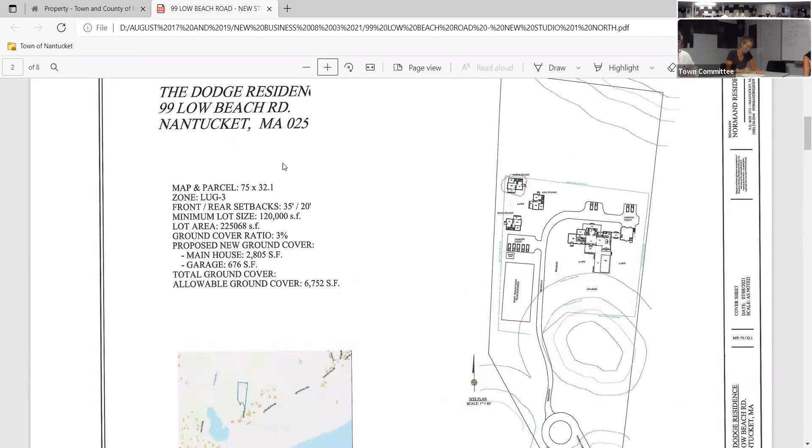It's like 500 feet from the other one. Maybe more, it's even more probably. Does somebody want to make that motion? I will make that motion to approve the whole thing. So that would be all three applications for 99 Low Beach Road, Studios 1, 2, and 3. Abby has made a motion to approve all three as submitted.

On Abby's motion, Diane, aye. Thank you, Stephen. He's gone? No, there, almost. Aye. Okay, great, thank you.

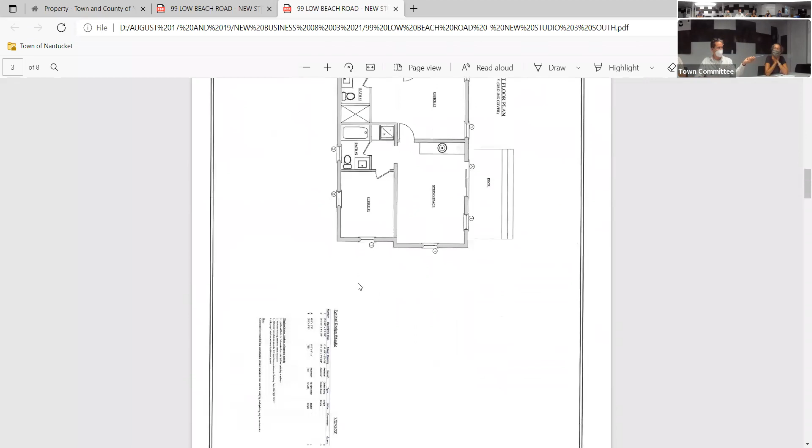John, I'd like to see the third one, please. Can we show John the third one? I don't believe everybody, you probably shouldn't. It's a good thing in this life not to believe what you hear. Skepticism. Who did I get? You made the motion, I'm in, right. So I have you, okay, on your motion.

So going back to Zoom, the hybrid thing was presenting all kinds of problems. This seems a little more comfortable being in this room with you all. Well, I mean, this feels a little crowded for this amount of people. Yeah, we're all masked, you know. It's at least a petri dish in there. Don't say that, as he's sitting at home with his windows open. You betcha. Oh, boy, yeah.

Yeah, it's the same exact thing. But how slow is it gonna go is the question. I don't think it goes any slower than Harvard.

Mr. Chair, that was the one app I could not find today, and I was hoping we weren't going to get to it first. How about two? Yeah, two, over here. Let's show John one.

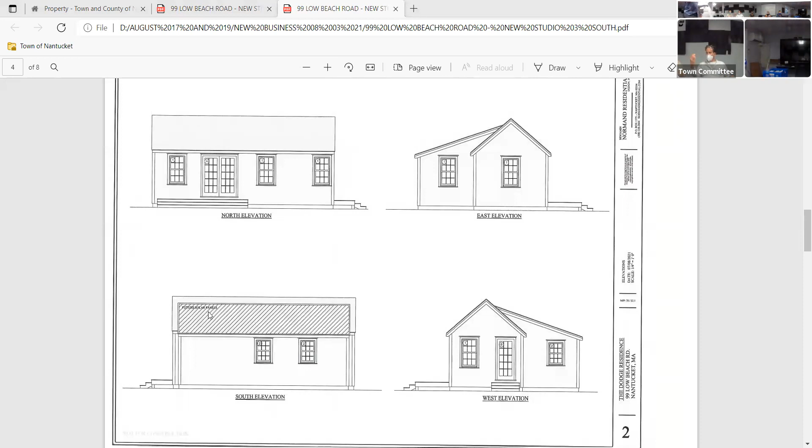John, just so you know, all three of these applications are versions of each other. I'm curious about their location on the lot, that's all. I want to match up all three of them, that's all. They're both the same. Oh, there we go.

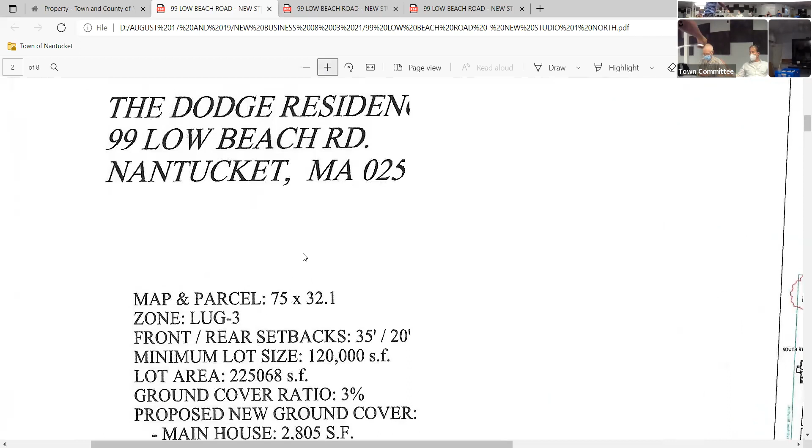They have a solar roof, right? No, we're not approving the solar just yet. That will come back to that. This is the living room. Thank you. You're very welcome.

I had a question, something else on. Oh, cool, you're good? Yeah. Okay, so there is a motion. Abby's made a motion to approve all three of them. Are you okay with that, John? Aye. Okay, so I'm in favor too, so that motion carries.

You got all three, thank you very much. I'll figure it out, thanks for your time. Pretty good. Okay, I guess we can adjourn for the day, folks.

Hey, Ben, you know that nice house on Westchester, they were gonna come back with the flower, the glass, did it ever come back?

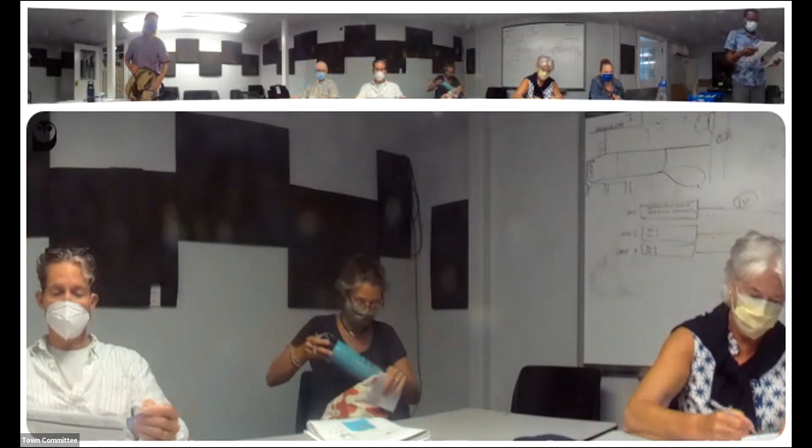Motion carries, okay, have a great weekend. Thank you, you too, Stephen. We're officially adjourned. And so the greenhouse? Yeah, for Westchester? Yeah.